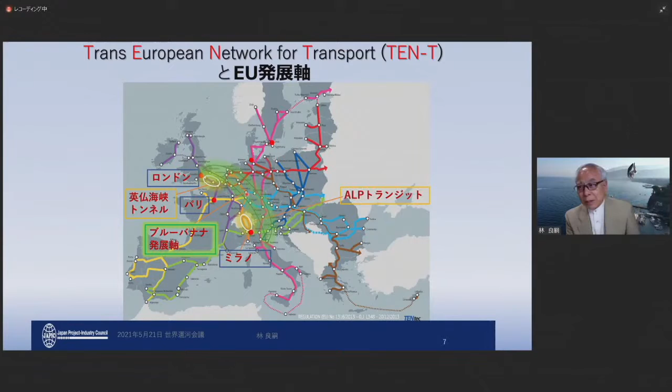So a mature society is mindful and conscious about environment, but competitiveness goes down after income goes up to a certain level. So how to maintain competitiveness is the key question.

So today we are talking about the Waterfront Revitalization project, but what I'd like to talk about today is Malmö in Sweden and Hamburg, Berlin.

My study team did not go to London and Leeds, but I will also introduce their cases. Usually, the cases involve the revitalization of declined areas.

Malmö has a shipping yard, and they try to redevelop this area in consideration of the environment. This is an integrated concept, not a standalone one. Hamburg is a logistics hub, but they thought about disaster risk reduction in commerce and culture. Berlin, environment, new capital and wide area network. In Leeds, environment, factory and warehouse revitalization. First, Malmö.

Malmö has a tunnel and bridge, and as a result of that connection, because of the Oresund Bridge, Copenhagen and Malmö formed a new economic zone, and every day about 100,000 people go across the bridge.

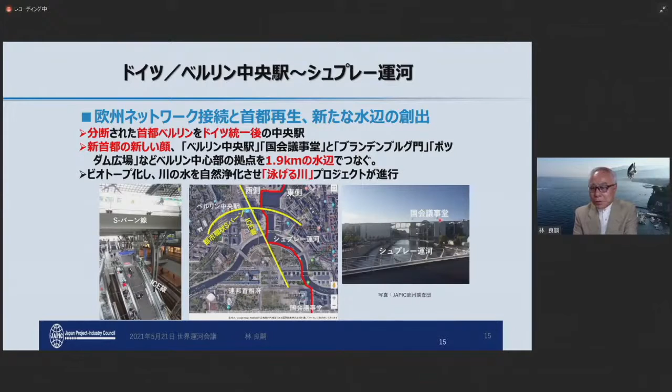Not only this station, but around the station, there is a Spree canal. On the right-hand side, the parliament building is located, and that's where the waterway was created. They can go to different places on the waterway.

Next, moving on to Leeds in the UK. It's 300 kilometers away from London to the north, and Leeds has a warehousing district that was declining in the inner city.

You can see before and after pictures. The industrial area was redeveloped. At the time Thatcher was there, I was a visiting professor there, staying for about a year. All these warehouses had plywood walls, and the unemployment rate in West Yorkshire was 30%, and for those below 25 years old, the unemployment rate was 60%. It was at the bottom, but Thatcher did a good job from the late 1980s to 1990s to grow the economy, and this area was revitalized.

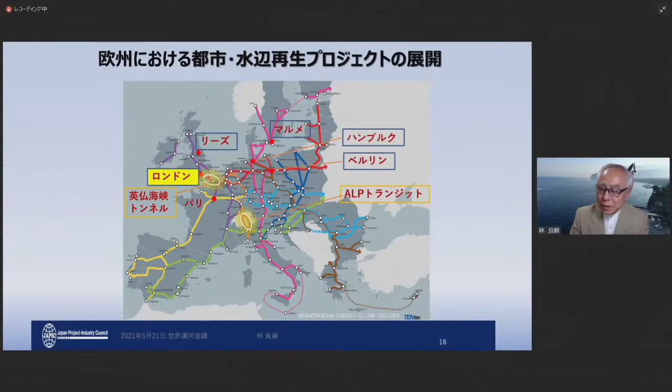Next, on London. From Paris, through the Channel Tunnel, Eurostar is running to London. From Paris, it's about 300 kilometers, and about 100 kilometers the railway is connected, but the railway is quite bumpy and slow. But now it's become better.

Looking at the UK, you first start from Paris Nord station, and then through the Channel Tunnel, you can go to St. Pancras station. At King's Cross, St. Pancras is located; that is a terminal. Originally, there was a Waterloo station.

What's interesting is that developers, the railway station and DHL established King's Cross Central Limited Partnership to drive the development forward. Originally this was a logistic hub, but it was declined. And this area has Docklands warehouse.

St. Martin in the Field is a very famous organization, and they started practicing their performance in the warehouse in the 1980s. Close by, there is a canal called Regent's Canal.

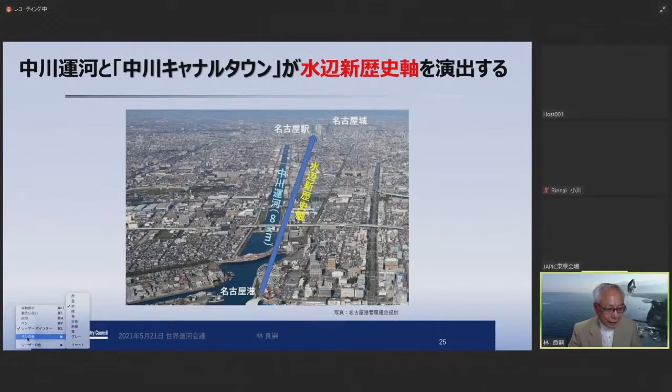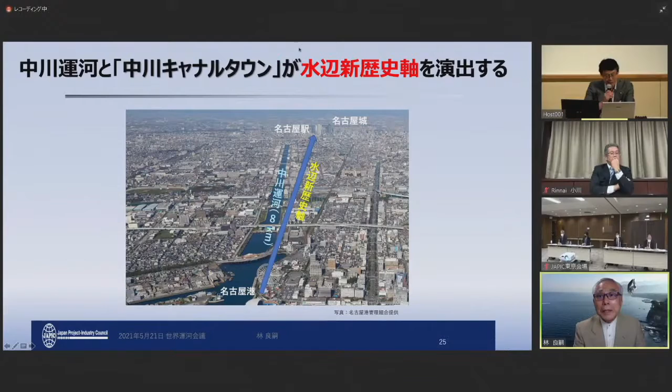I am here to pose an issue here. I would like to focus on the Nakagawa Canal as I present. So this is the agenda. I have three topics.

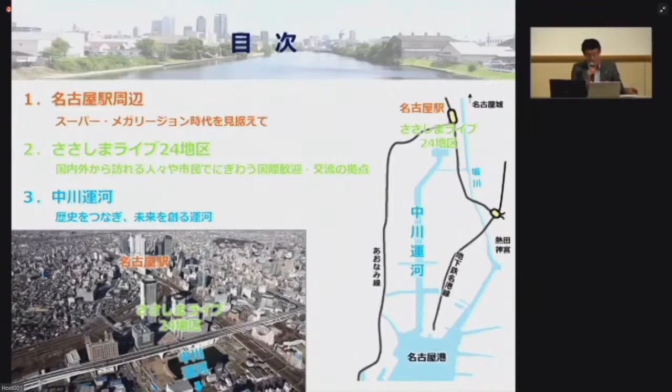The first one, after the new Central Shinkansen line is created, we want to create a super mega region around Nagoya station. Secondly, because the city and the canal will be connected, we want to create the Sasashima Live 24 district, which is an international welcome and exchange hub. And also, towards connecting with history and creating the future, I would like to look at the Nakagawa Canal.

First of all, around Nagoya station right now, Tokyo, which is Japan's capital, and Nagoya will be connected with the new linear Chuo Shinkansen line. It takes 1 hour and 40 minutes right now between Tokyo and Nagoya, but with the new Shinkansen line, this will be shortened to just 40 minutes.

Once that district is open, Osaka, Nagoya, and Tokyo will be connected within close to 1 hour, and will create a great zone of 70 million population. Nagoya will be in the center of this super mega region, and I believe that we could be the transport hub that will drive the growth of Nagoya.

Now, the station plaza and its redevelopment. In front of Nagoya station, we don't have a lot of attractions as a major hub. When we redevelop it, we want to make it an international destination, with infrastructure suitable to make Nagoya a super terminal station. We want it to be a place where people feel this is Nagoya, that everybody can utilize, a terminal station where people switch lines, and we want to link this with the Nakagawa Canal.

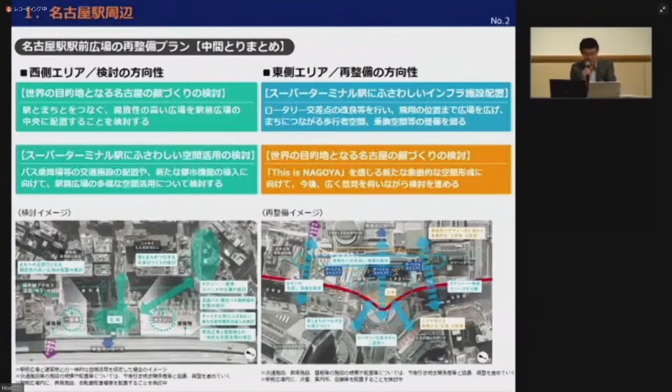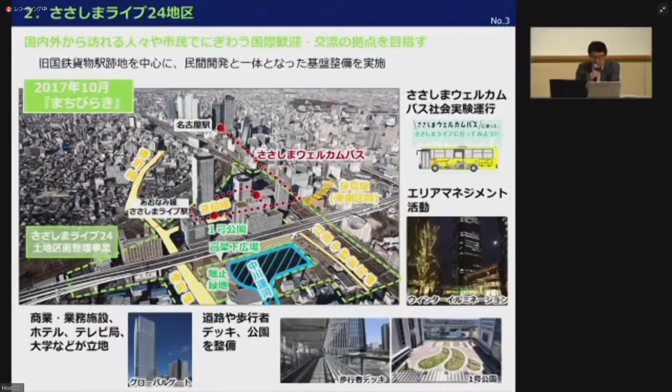Next, the Sasashima Live 24 district. The Sasashima district was newly opened in October 2017. It has vacant land which used to be the freight depot of the former National Railway, and was a hub for logistics in the past. In 1986, the freight depot service was discontinued, and many other infrastructures and facilities were created here. It became a place that connects the port with the city.

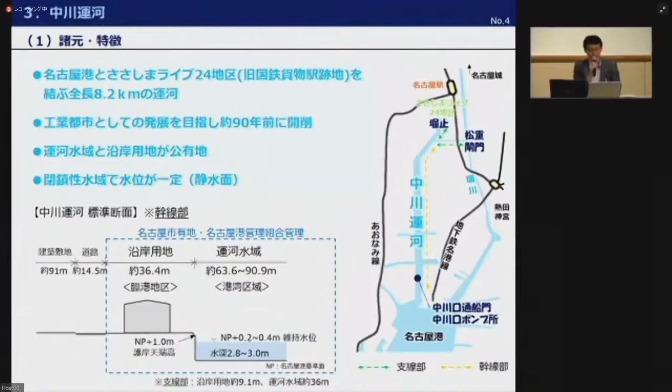Now, I would like to focus on the Nakagawa Canal, first its characteristics and how it started. Nakagawa Canal connects the Nagoya port with the Sasashima Live 24 district. It has a length of 8.2 kilometers, and about 90 years ago it was excavated and developed, becoming the number 1 Grand Canal in the Orient. The canal and the land along the shore is public land owned by Nagoya City, and the Nagoya Port Authority handles the canal area. It has a lock gate, making it a closed water area, so the water level is always stable.

Now, the history of the Nakagawa Canal. It connects the Nagoya port and the central part of the city. It was used for logistics and has supported the economic and industrial development of Nagoya. The southwestern part of the city is actually lower than average sea level, so after excavation of the canal, the land was mounded and some factories were invited into this district. Six years after development started, in 1932, the canal was in full use, and along the shore, warehouses, loading and unloading docks, and factories were created. So the canal was utilized along with the shore facilities.

A little bit more about the logistics and transport along the canal. In 1964, 57 years ago, was the peak of canal use for transport. That year, 75,000 vessels traveled along the canal, carrying nearly 4 million tons of freight. But after that, freight transport switched from vessels to trucks, and now the amount of freight carried along the canal is just 1% of the peak era.

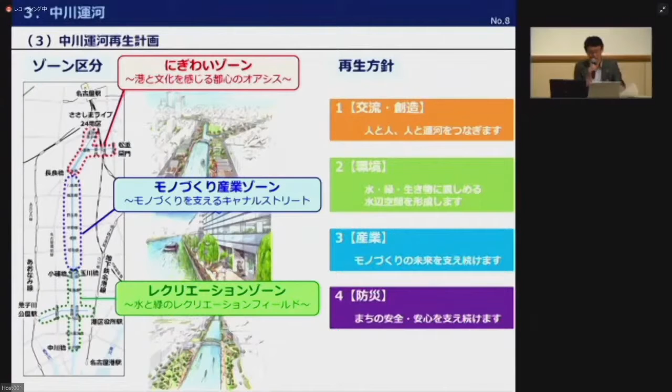Now, I would like to explain what is being done right now. First, the busy and bustling facilities around the canal area have special building codes, so land use was limited. But now we have guidelines for new use of the land, and special exceptions are being made so that commercial facilities and other facilities could be built. Vermicular Village is a shopping mall that has been created, and a coffee parlor was also established along the shores, bringing a new flow of people coming in.

Now the greenery and the promenade area. We want people to be able to connect with nature, with water, and with living creatures in the area. So we also have this green area, and the Hiromi leisure area, which could be enjoyed by many people. Next, about the waterborne traffic. For the revitalization of the canal and to make it a bustling place, Cruise Nagoya started operation in 2017.

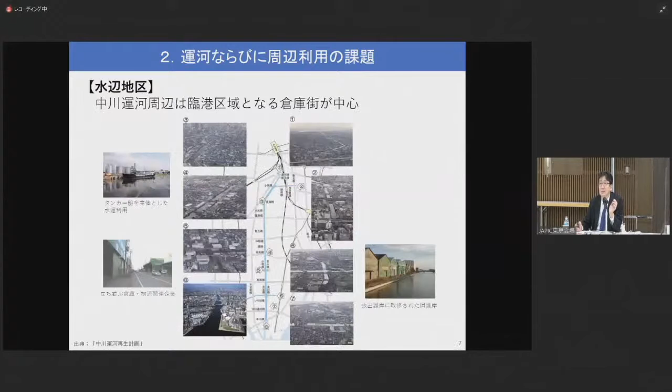As for the current situation and challenges, as you've already heard, Nagoya Station and the large urban zone are right close to the Nakagawa Canal. However, people are not very familiar with the canal. The Nakagawa Canal itself is connected to the warehousing district, so we have a vast water plane, but it is not connected to the coastal area. We want a bustling facility, and some areas are utilized that way, but that has not led to a greater trend.

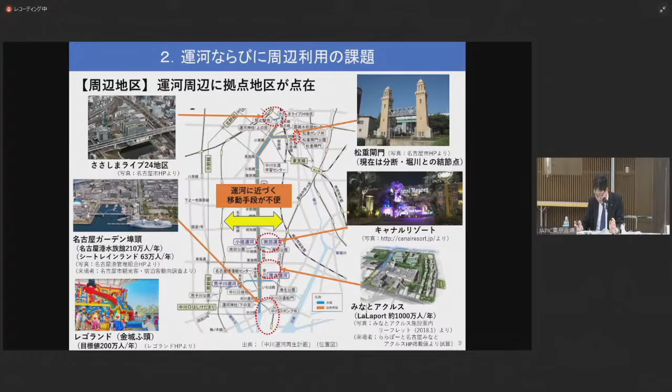That is the challenge. So against this backdrop, looking at the surrounding areas, what is happening? The Nakagawa Canal and surrounding area have many attractive locations, such as Sasashima Live, Matsushige Lock Gate, Nagoya Garden Pier, Legoland, Canal Resort, Minato AQULS. But they are scattered around and not integrated for people to enjoy, and a transportation mode that can bring people closer to the canal will be required.

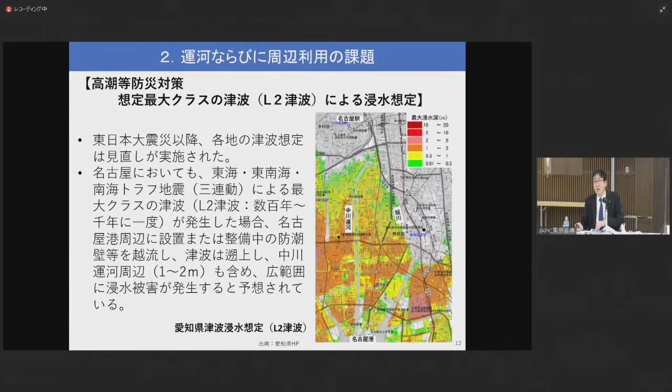Also, the water quality is not very good because of the closed water area. As for disaster risk reduction, Nagoya city is working on that, and development is ongoing to cater to this need. But the largest possible tsunami that we are expecting may occur, and in that case flooding will occur, so further development is required. These are the challenges we are facing, but we have to think about what will be the optimal revitalization plan.

In Toyama City, there is a canal called Fugan Canal. People did not come very close to this canal, but it was redeveloped and a Starbucks was established there—said to be the most beautiful Starbucks in the world. As a result, a lot of residents in the neighborhood started to come to this area, and the canal was revitalized. Now I'd like to move on to the proposal on the revitalization project.

A few years back, there was a Nakagawa Canal revitalization plan created by Nagoya City and Nagoya Port Union, and that is the basis of our proposal.

As you heard earlier, there are many social trends and challenges Japan is facing, such as aging of society, overcrowdedness and concentration of population in Tokyo, work style reform, and global issues including greenhouse gas, climate change, and an increasing number of disasters. COVID-19 has also led to new awareness, such as optimal distribution, avoiding crowdedness, and non-contact methods like online work and teleworking - these are the new normal.

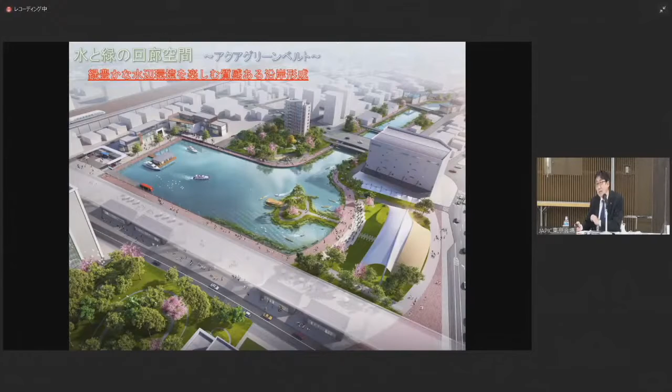This kind of waterside area needs to be created with abundant green. Second is the lifestyle renovation, where history and new elements are integrated.

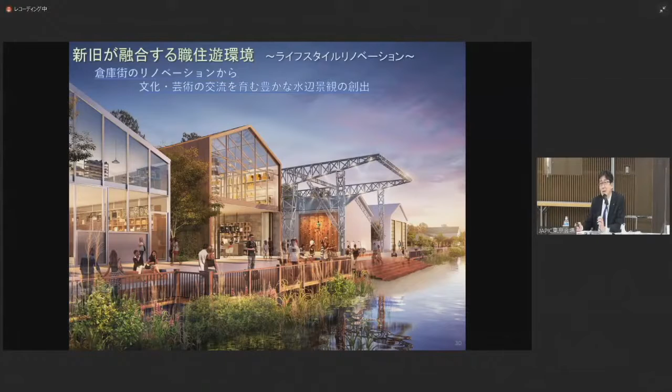New value can be brought to the warehouse district, and culture and art aspects can be incorporated to improve its value. Also, in the waterfront area, culture and art can be cultivated. That is the idea behind this proposal.

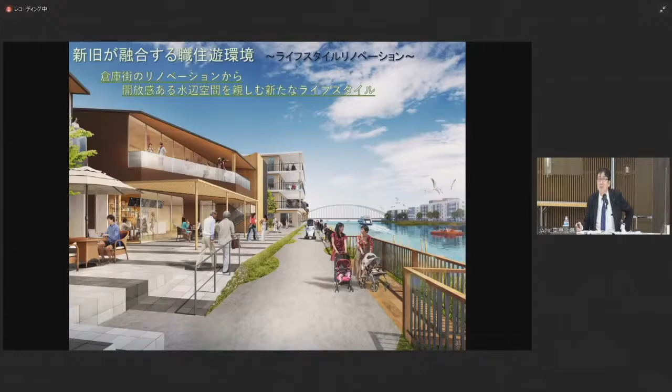The third proposal, the recreational area, is located downstream of the Nakagawa Canal. Renovation can take place there so that open space can be put in place, for example, living space on the left and working places on the right. These environments should be located in fusion so we can propose a new lifestyle, and we believe we can provide peace of mind to people.

But even if we put the infrastructure in place, if people do not come near the Nakagawa Canal, it does not make sense. So access is very important.

Access needs to be created from Nagoya Station to Sasashima Live District. We need to enhance convenience, and the left-to-right access via the Aonami Line and subway needs to be enhanced. Both vertical and horizontal access need better transportation using waterborne transportation.

At different hubs, various mobilities need to be connected. For example, super small mobility can provide transportation assistance, and autonomous driving vehicles such as green slow mobility can be provided, so a lot of people can utilize this area effectively. These are formulated and incorporated into our proposal.

In order to put this into concrete action, we need to have a sense of speed, and we must think about what kind of backup and support is required. First, what we need is to communicate and promote the attractiveness of Nakagawa Canal.

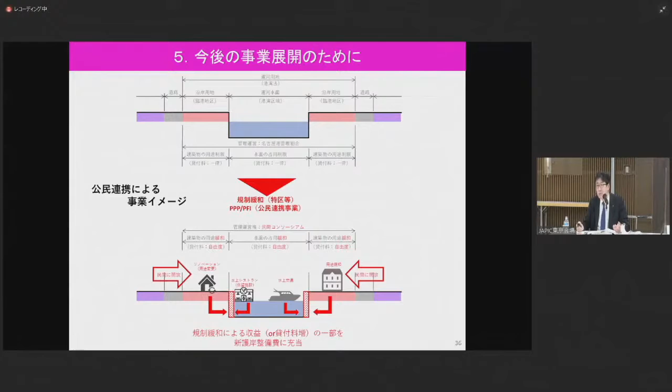About 130 to 150 meter area can be used by the private sector. With this kind of operation, added value will be created, and then the value can be utilized in developing and revitalizing the area further.

So in the end, in the future, we want to form a smart canal town in the area around Nakagawa Canal. We want to think about carbon neutrality, roll out smart mobility, and offer a new lifestyle.

Thank you very much for that. JAPIC is in the midst of compiling the revitalization plan, and we have heard about where the plan is right now.

Now we would like to hear from all the other panelists. We would like to divide the panelists into two groups. First, about the shoreline development and your opinion on the JAPIC draft, and about what you think about the future of the development plan. In the second round, how do you accelerate these activities? That is what I'd like to ask you in the second round.

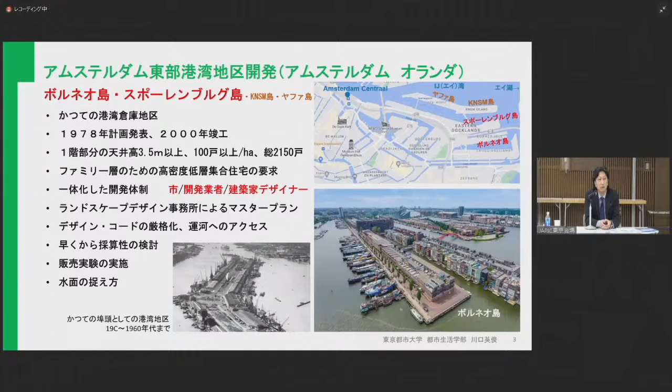And in Sporenburg and Borneo, many construction offices went in to work along the waterway in developing houses. It's like a townhouse.

About 30 or so offices got together, following a strict rule in building these new facilities. It was a very interesting way to develop houses along the waterway.

The water surface, as well as the private space, how do you draw the line between the two? And how do you connect between the two? People who live here will look at the water as their garden. Yes, this is in the Netherlands, so maybe that is behind the mindset of the people, but they look at the water as their garden.

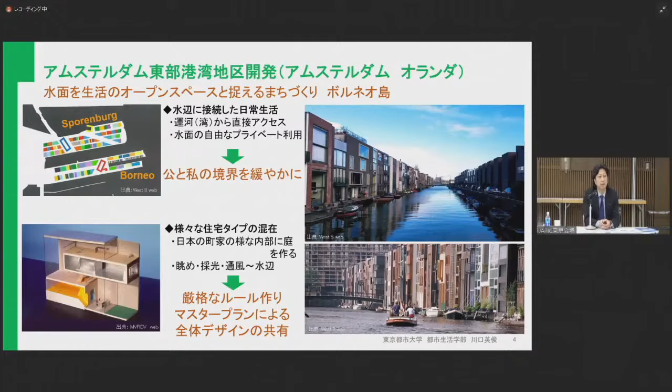And Professor Hayashi talked about this as well, but this is in Hamburg, the Hafen City. When I went there, it was during the very cold season, but I went on tours within the city and I heard from many people. The first thing that you hear is that Hafen City is not just designing a city, it's not just urban development, this is society development.

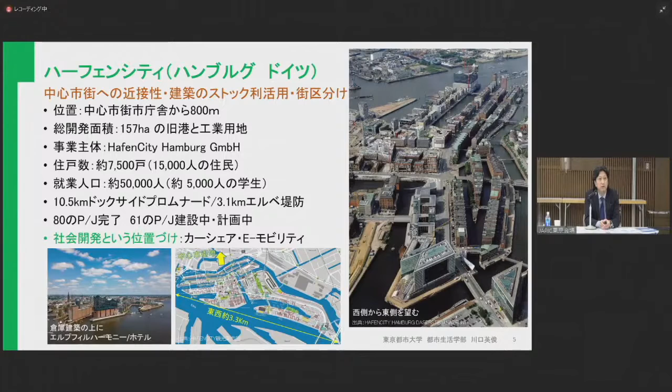In the Western countries, unlike Japan, when you start something, you have to focus on jobs and employment. And that was at the center. As Professor Hayashi said, education, housing, jobs, and culture, they all have to come into the planning. I believe that should be a major focus.

Also in the urban design, every year, several times, you have to understand that during the high tide season, the area might be inundated. People here said it's not a problem. Inside a cafe, you look outside and you might see some fishes swimming around and they say it's okay. But actually there are these sea gates or tide gates, using German steel for shielding the tides. So you have to create areas that can be inundated and areas that can't be inundated. You have to divide between the two.

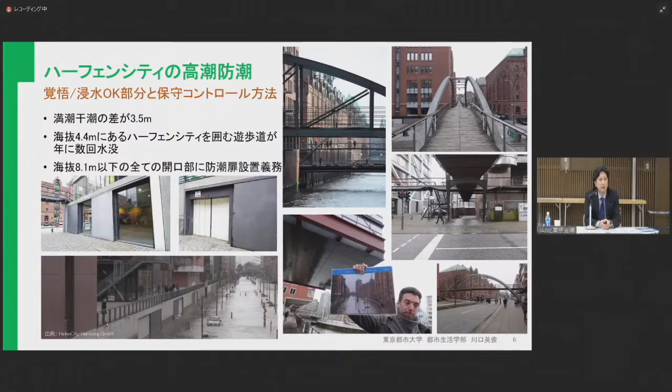We have closeness with the water, but we are also afraid of the water, and therefore we need to have technology, we need to have laws that regulate these things. And also the relationship between the public and private lands.

This was also very interesting. The right-hand top, you have the borders and you have the buildings. Outside these areas, you have the promenade area alongside the port, and some housing facilities, offices are cantilevered, and you can walk along under these areas. So even on a rainy day, it's like walking along a road with a roof. Hafen City is created in a way that is easily accessible by foot.

The left-hand photographs, this is a little bit west from Hafen City. This is the old city. And this is an embankment that stretches over this area. It was still under construction when I went there. It has been completed now, and there are many stands where people can sit down and look upon the water.

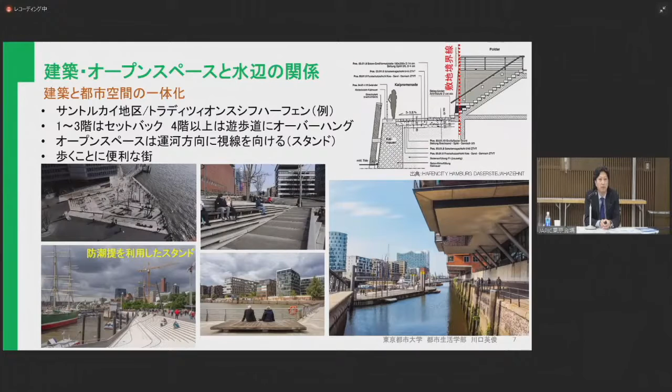I don't think I need to say this, but Osaka, Tokyo, the terrace spaces, and in Tokyo, you have the Sumida River, the river terrace area, using the private sector capabilities to build these facilities to create a floor space along and above the river. What is good about this? Of course, this is utilizing the ideas of the private sector. And of course, Tokyo has certified this, but the embankment cannot be seen from where you are because of these constructions. This is very interesting.

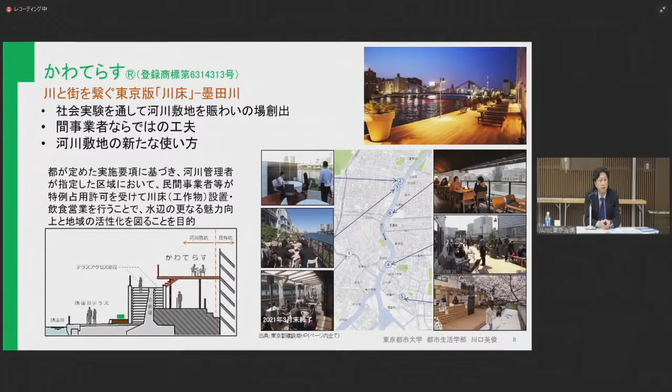The Kawa Terrace, or the river terrace, if you stand there, it makes you feel as if you are floating on the river water. So technique-wise, you might want to introduce these things along the Nakagawa Canal.

And within JAPIC, we have looked at the outer moat around the former Edo castle, and to create an area where people can come close to the water. Starting from there, Kanda River and the Nihonbashi River and Sumida River was made into a loop so that you can circulate around this area on boat. And also walking is very important. So maybe walking, cycling along the water.

Of course, these things cannot be created overnight. And this will be important for the Nakagawa Canal area. The good thing about this area is the water level only changes maybe 20 or 30 centimeters. It's relatively stable. But of course, in the Tokyo area, this example, this is an actual river, so the water level may change 1 meter, 2 meters.

So even if you ride on a cruise boat, the rivers that run through cities, actually the society is not facing them because people face the roads, so they have their backs against the river. But now how do you make people face the rivers? I believe that is what is going to be necessary when you think about the revitalization of the canal, the Nakagawa Canal waterfront area. Thank you very much.